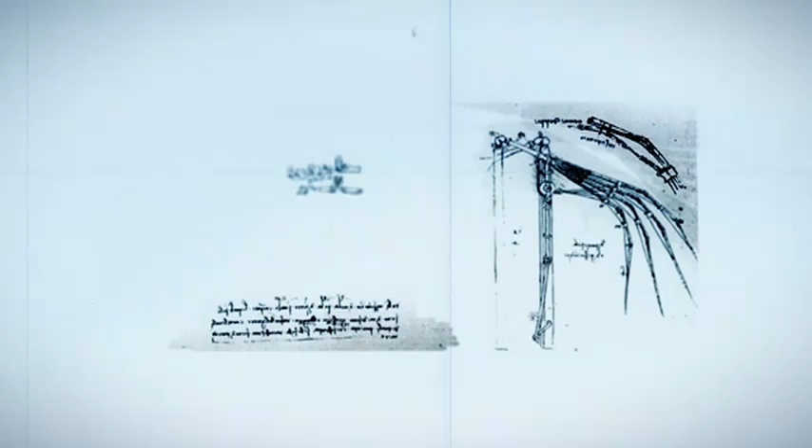Visionaries, scientists and pioneers of aviation such as Leonardo da Vinci saw flight as one of the greatest challenges facing humanity. For decades they observed bird flight, analyzed its motion and studied the anatomy of birds. They devoted great attention to the form and function of the wing and devised initial models.

Otto Lilienthal was the first to build an aircraft that could glide through the air. But he did not succeed in deciphering the flight of birds. The best pilots are to be found in nature, and in engineering terms, the efficiency of birds' flight remains unparalleled even today.

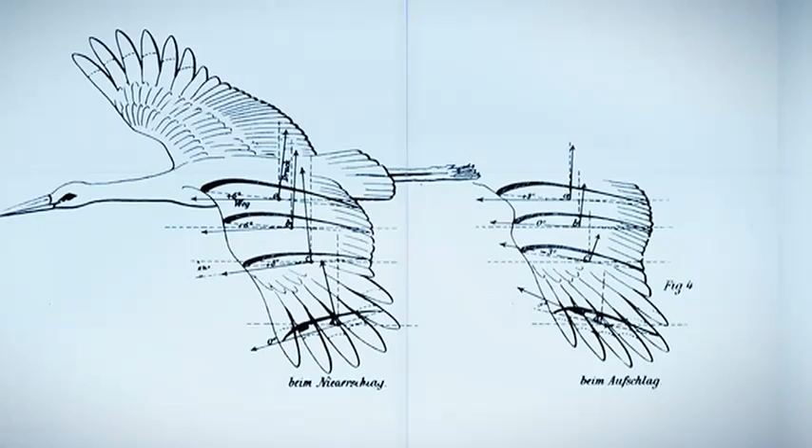Birds are experts in efficient movement through the air. The muscular strength of their wings provides them with both lift and forward propulsion. During flight, their sensory organs help them to constantly measure and optimize their movement. They make the best use of airflow under all conditions.

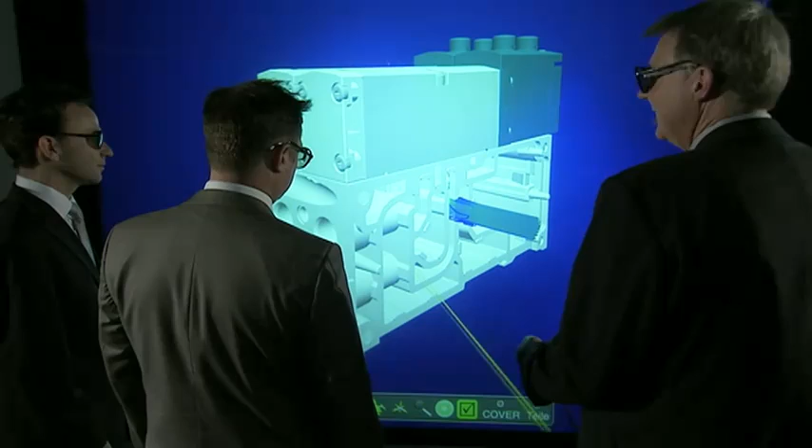The company Festo, a global player in the world of pneumatic and electrical automation technology, likewise has superior mastery of airflow. The development and production of the latest generation of cylinders and valves relies on making optimum and efficient use of the flow of air in automation technology.

As part of the Festo Bionic Learning Network, in which insights from nature are transferred to products in the field of automation technology, a number of filigree ultralight structures developed in accordance with bionic principles have already taken to the air. In Air Jelly and Air Ray, for example, helium provides the necessary buoyancy.

These were lighter-than-air devices. Designing a bird that's heavier than air, however, proved a difficult challenge even for the experts at Festo. The company's engineers and scientists pooled their resources to achieve something that no aviation pioneer or scientist had attained before them: deciphering the flight of birds. The idea for SmartBird was born.

This project is headed by Markus Fischer, who has supervised many programs from the Bionic Learning Network. I find it extremely fascinating in engineering terms to emulate the flight of birds. This is a great challenge.

Until now, scientific literature has claimed that it's impossible to construct a bird that flies with articulated wings. We created a team that we believe could succeed in achieving this. And what could be a better role model for SmartBird than the herring gull, with its impressive flight characteristics?

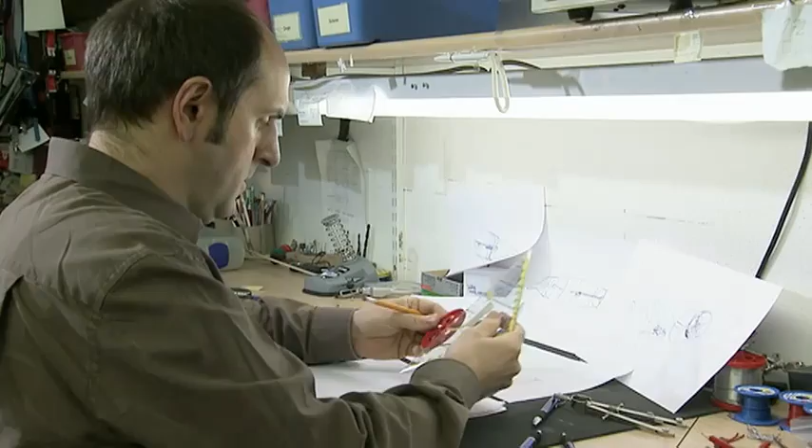SmartBird was to be different. The developers set to work with great enthusiasm. The researchers came up with a brilliant idea. They set out to develop SmartBird as a biomechatronic overall design.

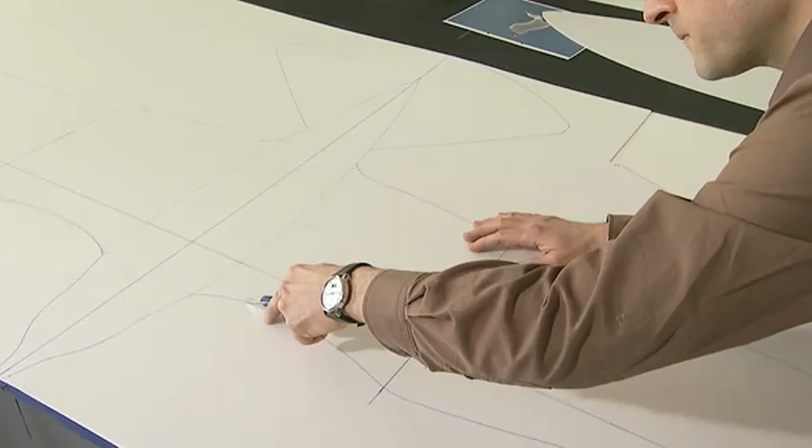This means that a bionic lightweight mechanism is combined with electric propulsion technology, smart control and regulation systems, and intelligent software for the control, monitoring and optimization of the flapping wing movement in real time. Fluid dynamics theory was also incorporated, and the project was carried out under scientific supervision.

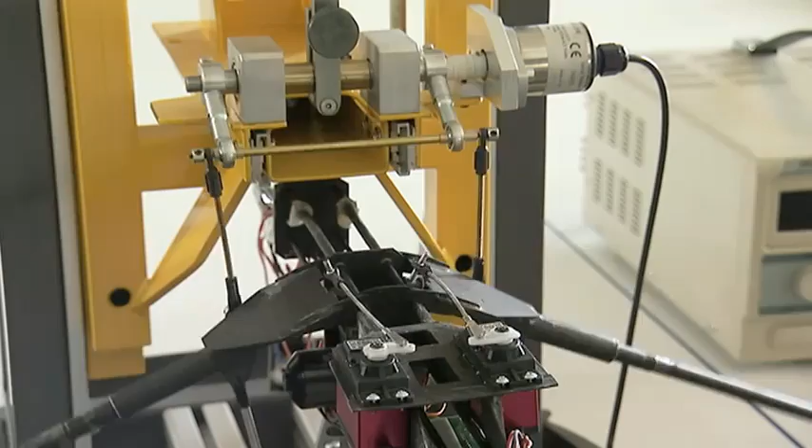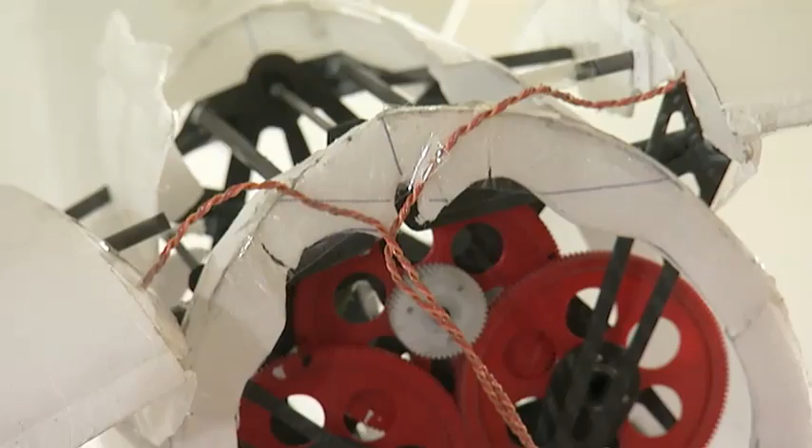Tests and measurements were carried out, and various wing contours developed and discarded.

A great many tests were needed to finally arrive at the appropriate shape of the wings and their optimum angle of inclination. The outcome of this cooperation was a wing which had not previously existed and which many researchers had not thought possible. The new wing combines two functions of bird flight: propulsion and lift.

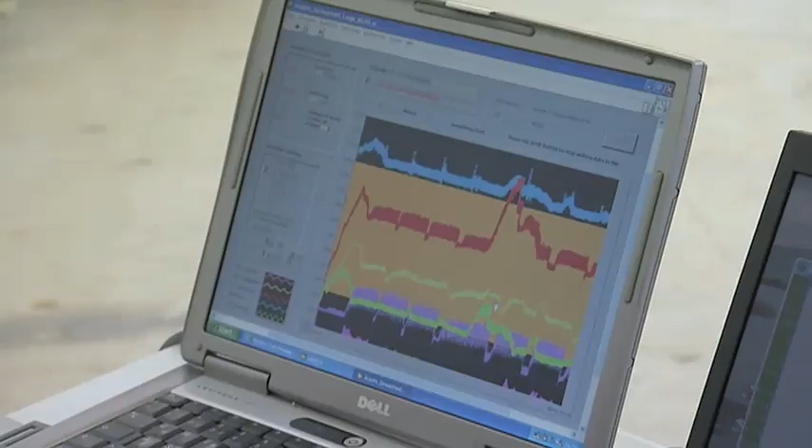The next challenge was to enable SmartBird to modify its wing position during flight in order to adapt to changing airflow conditions. The outcome was a sophisticated control software that left nothing to be desired.

By means of two-way radio communication, the condition monitoring software allows various parameters to be monitored, such as wing position or torsion.

If you look at the wingtip right now, you'll see the twist. I'll adjust it up and down.

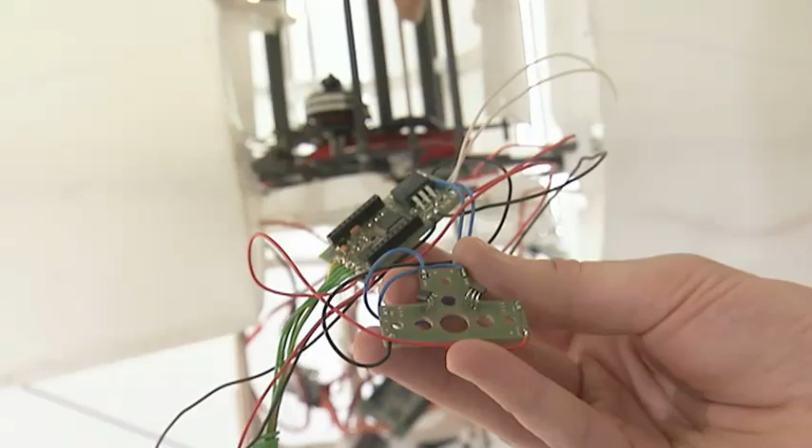We can determine the motor's position by means of Hall sensors. And we can analyze the position of the wing's surface with high precision using a microcontroller. We can optimally adjust the torsion as a function of the wing's position and the speed of their beating motion. By this means, we attain optimal efficiency for SmartBird.

With condition monitoring, the team remains constantly informed of operating data such as battery charge level, power consumption, and input from the pilot.

The first test flights are about to take place. Tension mounts for the members of the team, and their expectations are high. After all, countless hours of work have been put into this one model. SmartBird must now prove that it can fly.

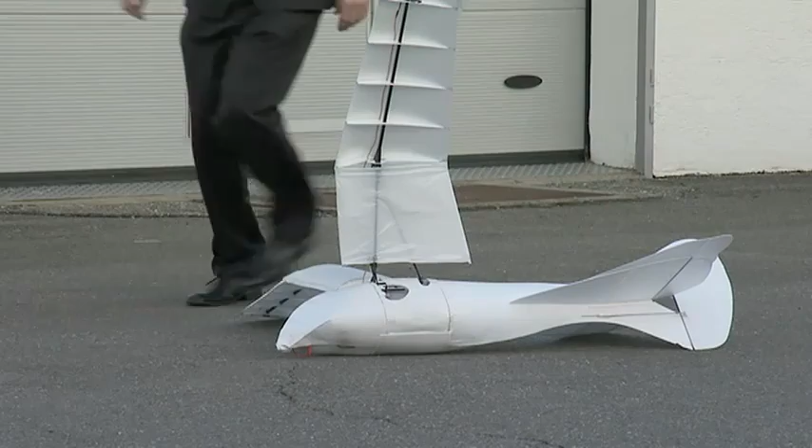The first test flights are launched by hand, but SmartBird refuses to remain airborne. The tests repeatedly fail. The bird can't fly more than a few meters. The team is disappointed, even though this is just the first prototype.

They had expected too much. After all, it didn't have to succeed at the first attempt. But questions are asked and answers sought. Why did the test flight fail?

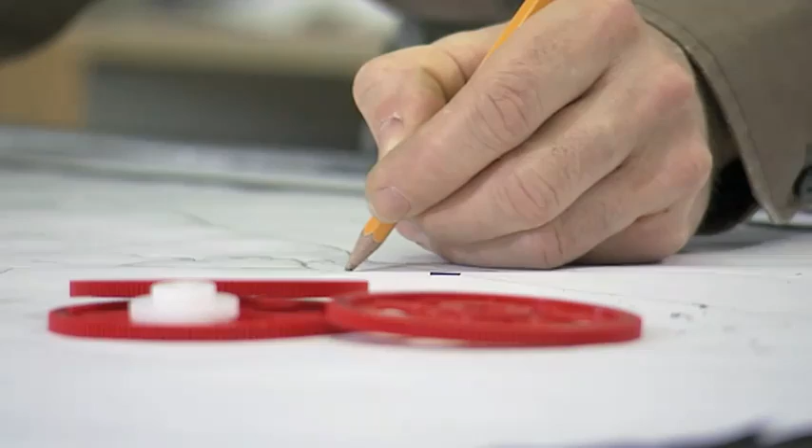The entire construction, inspired by the natural model, is now about to be revised. SmartBird is to be made lighter and therefore more energy efficient. At the same time, the bird's center of gravity is displaced to make its flight more stable.

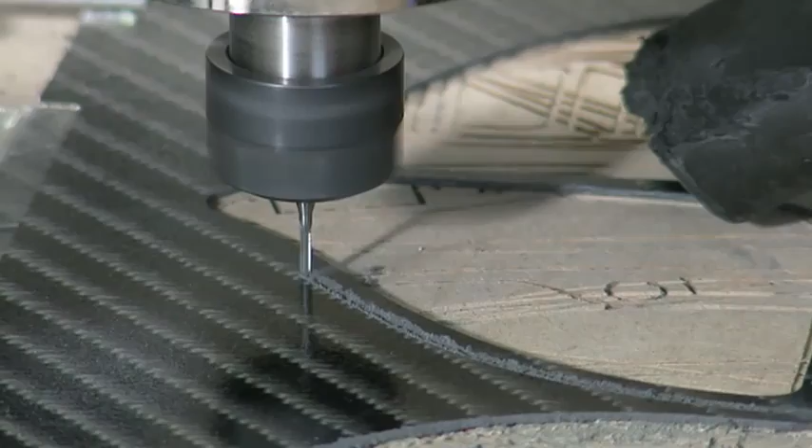A sketch provides the basis for the technical drawing. This is then transferred to a computer, which generates the data for the automatic milling machine that cuts the individual parts out of a thin

sheet of carbon fiber. SmartBird is made up of a total of about 130 components such as these, which ultimately constitute the bird's mechanical structure.

Special attention was given to ensuring a lightweight design for the flapping wings in order to keep the mass of SmartBird's moving parts to a minimum. Carbon fiber and lightweight foam plastic were the obvious materials for this application. Here, for example, we have a wing rib made from carbon fiber, which was milled in a network pattern from

a very light structure and weighs about a gram. And for this torso structure, we of course made the skeleton from carbon fiber. When assembled, the torso weighs about 26 grams.

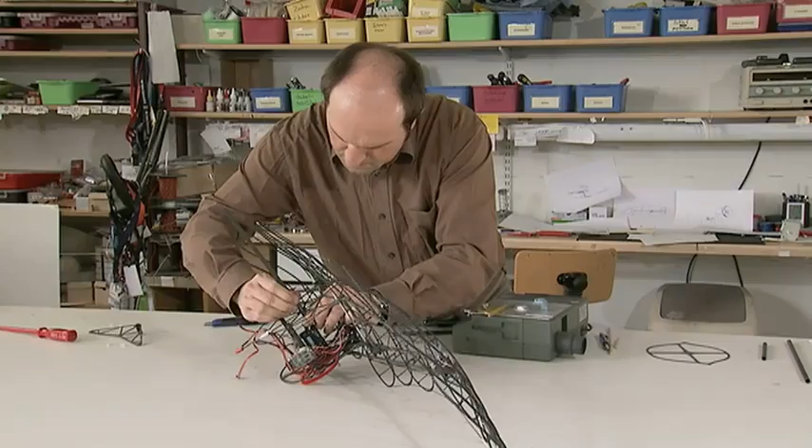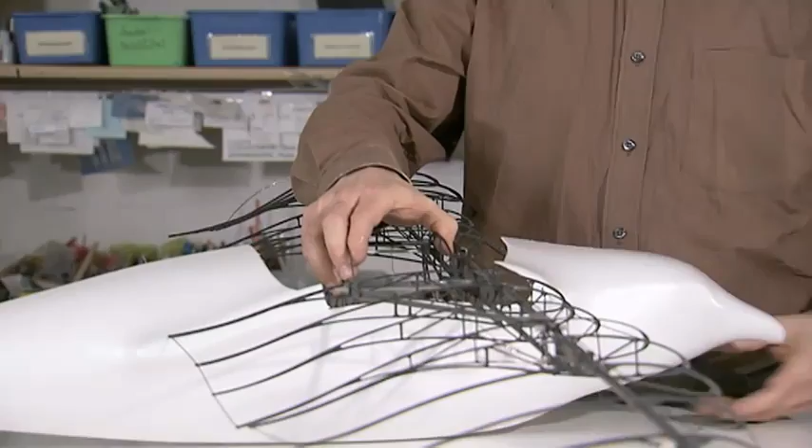Once the parts are assembled, the future contours of SmartBird become visible. The construction is now complete, and all issues seem to have been clarified.

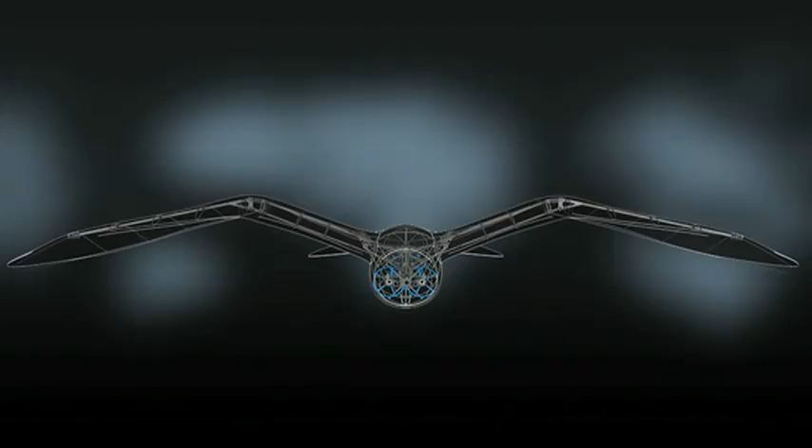The wing unit consists of a primary or hand wing for propulsion and a secondary or arm wing for lift. An electric motor provides the wing's flapping movement via a two-stage gear. Both the flapping and bending forces are conveyed from the transmission to the hand wing via a flexible link.

The crank mechanism has no dead center and thus runs evenly with minimal peak loads. This ensures smooth flight. At the end of the hand wing is the servo motor that actively rotates the wing. Three sensors make it possible to determine the exact position of the wings at all times.

The opposing movement of the head and torso sections in all spatial directions is synchronized by means of two electric motors and cables. The torso thus bends aerodynamically with simultaneous weight displacement. This makes SmartBird highly agile and maneuverable.

Final testing at Festo's Technology Center. The performance data are excellent, and the forces deployed by SmartBird impressive. This is the moment of truth.

All the new findings have been implemented, and there's nothing more standing in the way of a new flight test. The development team is nervous. All the effort over the past months is now being put to the test.

It's now time for the test flight that will show whether the inventors have taken the right course. The takeoff is successful, but the team is completely unprepared for what happens next. It's difficult to maintain SmartBird airborne. It crashes time and again.

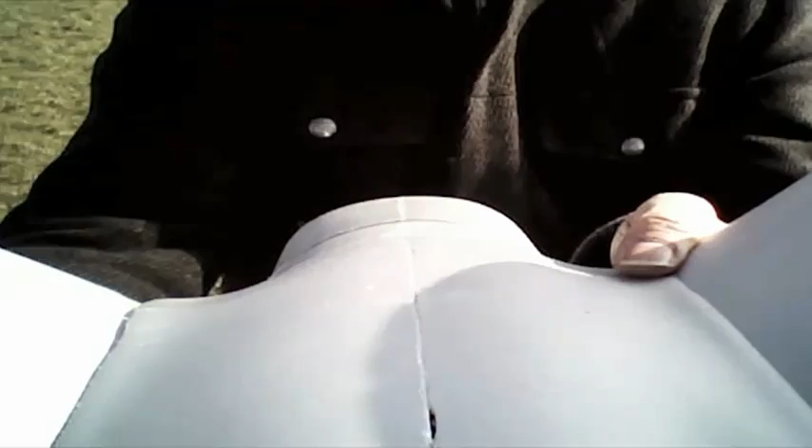SmartBird flies almost effortlessly through the air. The scientists and engineers at Festo have succeeded in further stretching the limits of feasibility in flight.

On the Baltic coast, SmartBird is given its first opportunity to fly together with other gulls. This is a very special moment for Markus Fischer, who provides us with a summary.

It makes me very happy to see our bird flying here together with the real gulls. This is a fantastic experience.

The SmartBird project has taught us at Festo a great deal about energy efficiency, particularly in the matter of airflow optimization. Only when the wings are twisted to just the right position can we exploit the airflow to the full, so that the bird can fly with active torsion.

Another issue is control and regulation. Only when the flapping action and the rotation, in other words, the active torsion, are in perfect harmony, can SmartBird at all succeed in taking off. We'd never thought we could get as far as this.